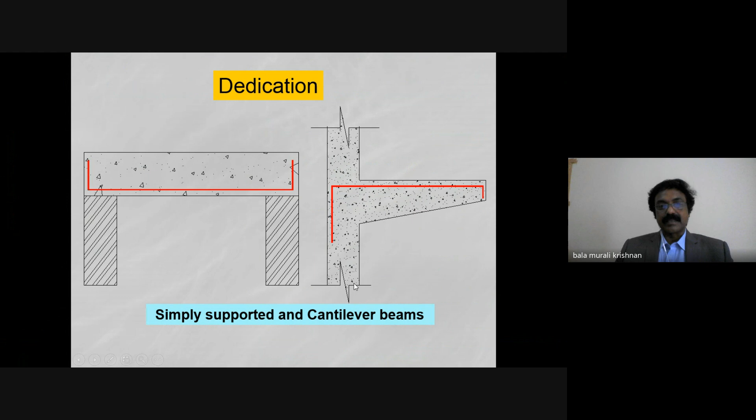Then who is an engineer? According to former USA President Herbert Hoover, who was an engineer before he became a politician: the great liability of the engineer compared to men of other professions is that his works are out in the open where all can see them. His acts, step by step, are in hard substances. He cannot bury his mistakes in the grave like the doctors. He cannot argue them into thin air or blame the judge like the lawyers.

He cannot, like the architect, cover his failures with the trees and vines. He cannot, like the politician, screen his shortcomings by blaming his opponents and hope the people will forget. The engineer simply cannot deny he did it. If his work does not work, he is damned. This is the major problem for civil engineers - we cannot hide anything, everything is open. Everybody can come and see his work, that is witnessing his work also.

So start from concrete. The base material for concrete is cement. Cement is a binding material. The age of cement is nearly 150 years. Earlier the grades were 33 grade cement, 43, 53. Now people are using PPC, meaning Portland Pozzolana Cement, which is fly ash based and silica fume based, in 43 grade.

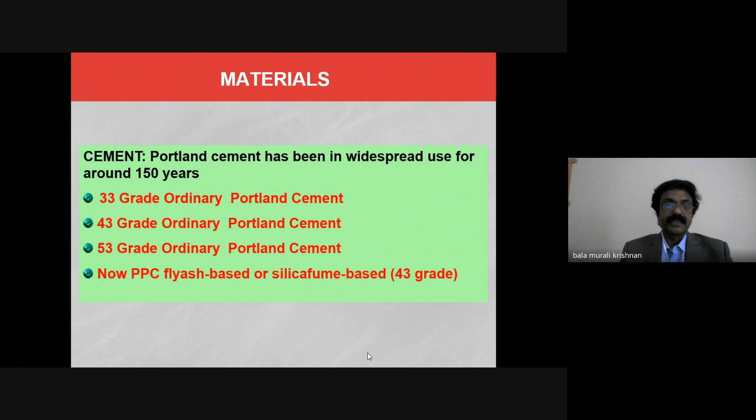M is a mix, 20 is the characteristic compressive strength of concrete after 28 days curing. So the minimum grade as per IS 456 for RCC is M20, for PCC is M15. For pre-stressed concrete, we have two types: pre-tension and post-tension. The minimum grade is M40 and M30.

Then come to rebar. What is the meaning of rebar? Rebar is nothing but a reinforcement bar, or we can say steel. The term reinforcement bar is worldwide accepted. If we come to Gulf countries or other countries, the people are calling it rebar only, not saying steel.

Okay, so earlier we were using mild steel. Do you know the meaning of mild steel? This is a plain bar without any ribs. The yield strength is not more than 250 Newton per millimeter square. That is the maximum range of mild steel.

Then they can go for Tor steel. Tor steel is normally drawn from mild steel, that word 'drawn' is very important. If you look at the stress strain curve for mild steel and Tor steel, mild steel has a definite yield point. Tor steel has no definite yield point, it's moving from beginning to end. Why is this happening? That's because Tor steel is drawn from mild steel, that's why there is no definite yield point for Tor steel.

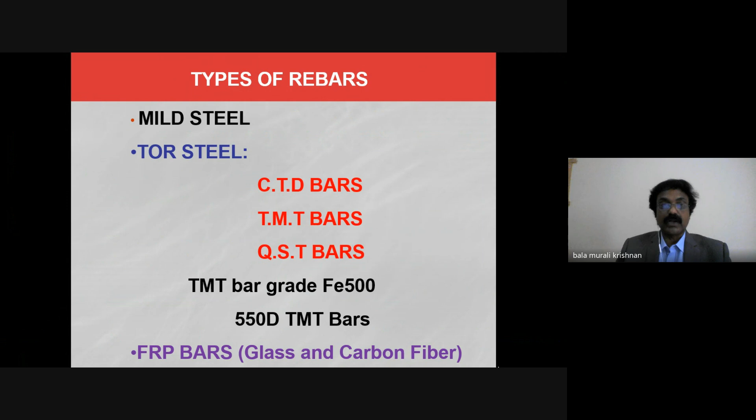The recent development is FRP bars, fiber reinforced polymer bar. If we talk about fiber reinforced polymer, we have two types there. Glass fiber is very famous, and carbon fiber, and one more fiber also is there, aramid fiber, that is very costly. That's why people are trying glass and carbon fiber.

And one more bar is there. If your construction is very close to the coastal area or an offshore structure, we go with coated bars. Coated bar means fusion bonded epoxy coated rebar, just like electroplating technique, where at a constant temperature the bar is moving into the paint booth.

The paint is already electrostatically charged paint. They stick onto the surface. It is a flexible epoxy system.

So we have enamel paint, polyester resin, then epoxy. Epoxy is the superior one. It's a two-component combination, base and hardener. If you mix them together, the polymerization process will take place, so epoxy is very rigid and flexible also.

If you apply it on the bar, what will happen? If you bend the bar, the paint also bends accordingly. This is the advantage of the paint. Otherwise, if you bend the coated bar, the paint will peel off. That's why they use the flexible epoxy system.

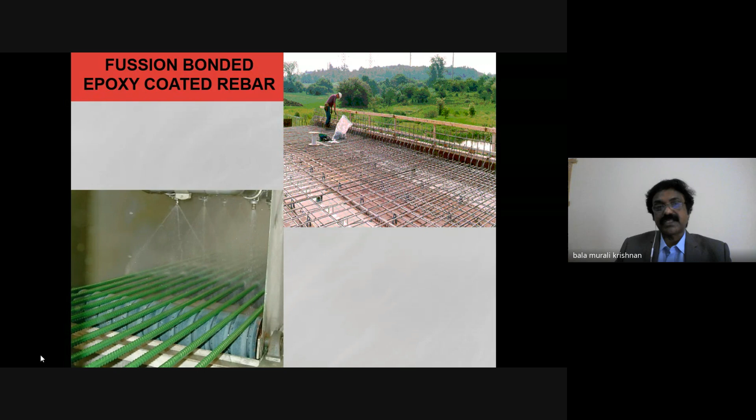If you bend the bar, the paint also bends accordingly. Normally the thickness is 250 to 500 microns. Do you know the meaning of microns? 1 divided by 1000 - that is a micron.

Next, FRP bar, which we discussed earlier. So this is for glass fiber. Now the recent development, we are using carbon fiber also. Then hybrid fiber also, mixing glass and carbon fiber together. Hybrid bars are available, FRP bars are available.

So the only problem is shear. The remaining thing works fantastically. We did a lot of experimental work in our college, in our university. The problem is shear, because of modulus of elasticity. Modulus of elasticity is very poor compared to steel. That's why shear is the major problem for FRP rebar. For bending it's okay, ductility is okay, everything is fine. Only for shear, you have to be doubly careful when using the FRP bar.

Once you use the FRP bar, there will be no corrosion. Corrosion is a major culprit for buildings. Corrosion is nothing but a cancer process in concrete - it's concrete cancer, similar to human cancer. Once the cancer starts, it will propagate everywhere. This is the major problem for concrete. If your rod is not corroded, you can ensure your building lasts 100 years or 80 years. Because of corrosion only, the building lifespan gets reduced.

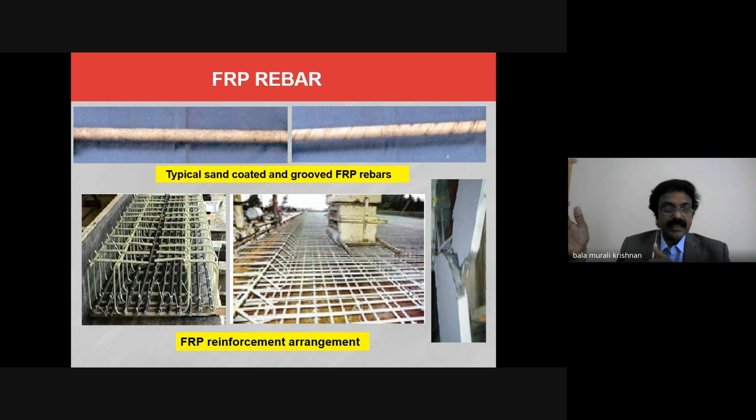Next we come to coefficient of thermal expansion. This word is very important for concrete. We are using it for RCC, which has two materials - concrete and steel. It is a composite material. As you know, the meaning of composite is two or more elements of different material acting together and carrying the load. In concrete, we have two materials, one is concrete, another is steel, acting together and carrying the load.

So normally we tell our students that concrete and steel are made for each other. Made for each other - how? Normally we say lovers or husband and wife are made for each other, but here concrete and steel are made for each other. The only reason we cannot replace steel right now - that is the major issue going on. We have been using concrete RCC for nearly 150 years, almost 150 years, and still we are not able to replace the steel.

Even rich or big persons cannot go for a golden rebar, copper rebar, chrome rebar, etc. What is the reason behind that? Only one thing - coefficient of thermal expansion. The coefficient of thermal expansion for steel and concrete is almost similar. That is the only reason concrete and steel act together monolithically. That's what we call a match - made for each other. At high temperature, like our Gulf countries, say Muscat, where temperature is more than 50, 55 plus, the hot temperature, steel and concrete still do not separate.

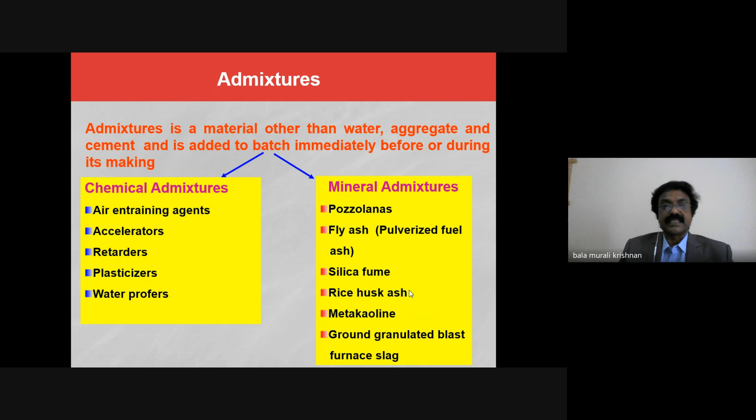Then plasticizers, as we just discussed - they're very interesting. The role of plasticizers is to reduce the water content. But reducing the water content means the workability will be lost. How do we balance the workability with the help of plasticizers? So the normal range is 5 to 10%, mid range is 6 to 15%, high range is up to 40%. We reduce the water content - the role is very important.

If you mix superplasticizer into the concrete, what will happen? This superplasticizer makes each and every molecule of the concrete separate - they form a small balloon around each particle. Because of this balloon, each particle departs from the others, making it friction free, so we can easily mix the concrete. During the hardening and setting time, each of these molecules or bulb molecules around the particle ruptures, and finally there is no superplasticizer left. This is the concept of superplasticizer mixing into concrete.

So many companies are producing superplasticizer. In India, Fosroc Chemical is there, Sika, Pidilite, LK, Hurricane - many companies are available nowadays producing superplasticizer. The range is very important.

But before adding superplasticizer into the concrete, you should know the quantity. Even the manufacturer doesn't tell the exact quantity, only a range - they give 50 to 250 ml for 100 kg of cement. If you look at any manufacturer brand like Fosroc Chemical Superplasticizer, they mention it like this. You have to narrow it down and go with a lot of trial mixes.

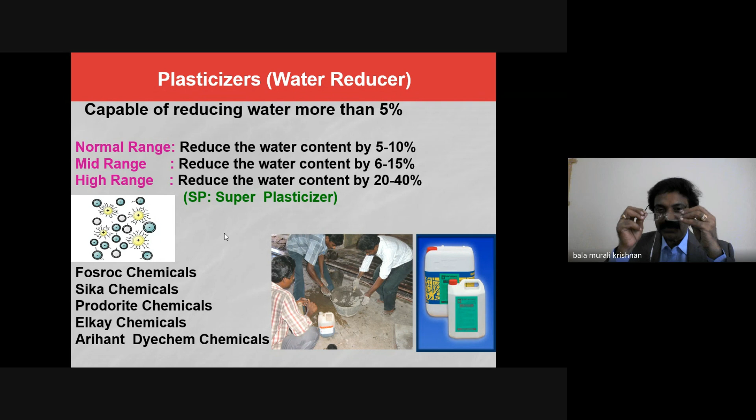So what happens? Delayed setting time. Delayed setting time is also a major drawback in the concrete. It loses strength. Suppose we are fixed for M20 grade concrete - due to delayed setting time, the concrete will not achieve 20 Newton per millimeter square at the end of 28 days curing.

So I didn't tell anything to that fellow, otherwise he may worry. I asked them to cover it with gunny bags, with a small wetting of the gunny bags. I told him it will set after 24 hours. But finally, how much did it take? Nearly 36 hours to set the concrete because of excess superplasticizer.

You should control the superplasticizer added into the concrete. That is very, very important. Don't simply purchase from the market and add it to your concrete without any idea or without any base study.

Then composites, polymer-based composites - nowadays a lot of required materials are available in the market, based on polymer modified concrete, polymer impregnated concrete. These things are available in the market. Latex modified concrete - latex is a rubberized material, an artificial rubber, not a natural rubber. Then FRP, we discussed it earlier.

GFRP, CFRP, aramid, and cement-based concrete - ferro cement, SIFCON, slurry infiltrated fibrous concrete, slurry infiltrated mat concrete. These are normally used, SIFCON types are used for bomb blast structures, because the tensile capacity is very high.

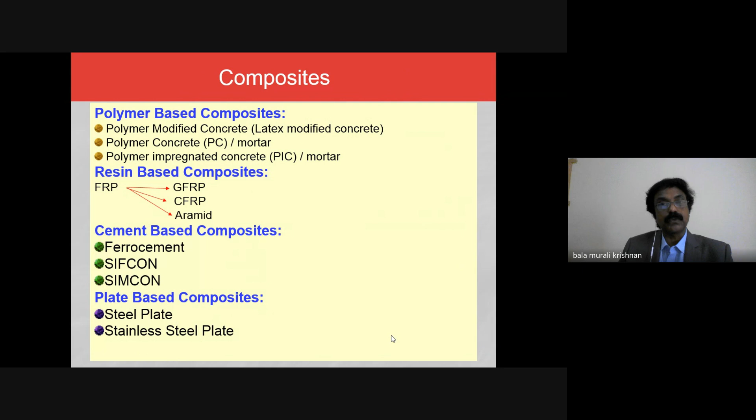I tried this in my beam retrofitting system also, I will tell you a little later. Then plate-based composites - steel plate, stainless steel plate, you bond these on the surface of the concrete, either beam, slab, or column also. This is for external reinforcement.

They are using this for CFRP - carbon fiber wrapping, steel plate. This is for retrofitting or enhancement. Retrofitting is nothing but enhancement. Rehabilitation means to retain the original load carrying capacity of the structure.

To retain means to go back. Retrofitting means enhancement - suppose you want to increase the capacity of the column or beam, whatever it be, so you can go with this kind of retrofitting using steel, GFRP, CFRP, etc.

So this is glass fiber mat wrapping, bonded into the bottom surface of the beam, that means the tension face of the beam. For the column, it's wrapped around all four sides. This normally increases the load carrying capacity by 30 to 40%.

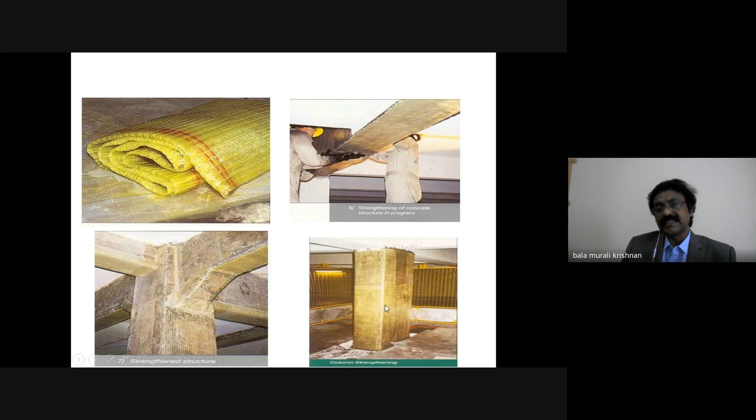We are using this kind of retrofitting system, normally increasing the capacity by 30 to 40%. This is carbon fiber wrapping, also retrofitting. See, the beam and column are in perfect condition without any distress in the concrete.

Why do they go for these things? They want to apply the retrofitting technology - retrofitting means enhancement, further improvement. See, this is carbon fiber wrapping in the column. This is a beam-column joint, four beams meeting at the column, using carbon fiber wrapping.

Normally for seismic design, the beam-column joint is very important - mainly the joint fails during an earthquake or heavy wind blowing. Compression and tension continuously act there, and finally it gets detached. So this is a vulnerable zone.

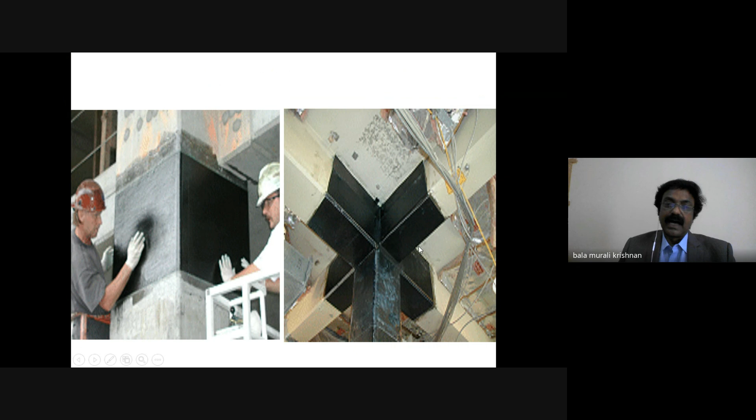For seismic-prone areas, this is ferro cement. Ferro cement is very famous - not just now, but for more than 50 to 70 years, ferro cement has been very famous.

Installation is very easy without much difficulty. As you might have seen in the drops of the portico, everything uses ferro cement, chicken mesh or weld mesh with high performance mortar. The mortar ratio is 1:2 or 1:3, just mortar, and it will penetrate into the gaps of the mesh. So finally, it becomes a reinforced mortar.

In high temperature regions like Gulf countries, people use mesh at the outer surface before plastering, which increases the tensile property of the mortar. So finally, to avoid micro cracks and macro cracks on the surface of the wall, ferro cement is the easiest and cheapest method of repair.

It acts as a repair material, and also as drops, panels, and precast panels. For small water tanks, we can go with ferro cement water tanks. Even small boats are available in India made with the help of ferro cement.

Normally we use skin reinforcement to maintain the shape. This is the skin reinforcement, normally smaller diameter, 8 mm or something. Over that, you put chicken mesh or weld mesh, single layer or two layers, it depends. Ferro cement is a very cheap material, easily available in the market. Chicken mesh is available in rolls.

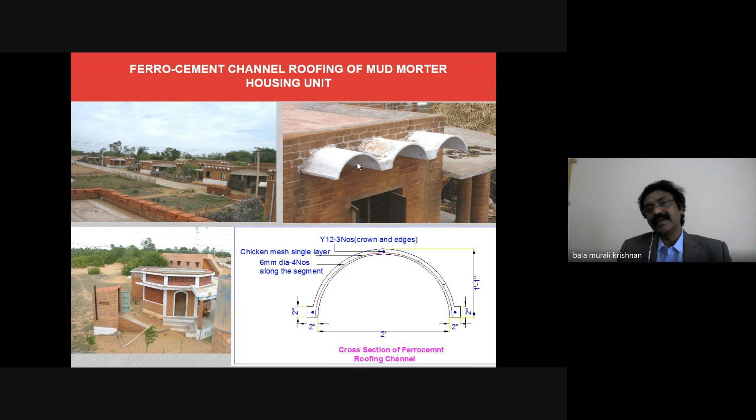So this is a lightweight partition. If you go to high-rise buildings, the major problem is dead weight. How to reduce the dead weight of the building? The only thing we cannot reduce is the column and beam size, that is as per the design. The only thing you can reduce is the filler material, meaning partition, outside wall, inside wall, whatever it be, we can reduce.

So normally, using lightweight material, we get lightweight partitions. Lightweight material means pumice, sintered fly ash, many things available in the market. The density is around 450, and one more option is ALC panels, autoclaved lightweight concrete, with density around 650 kg per meter cube.

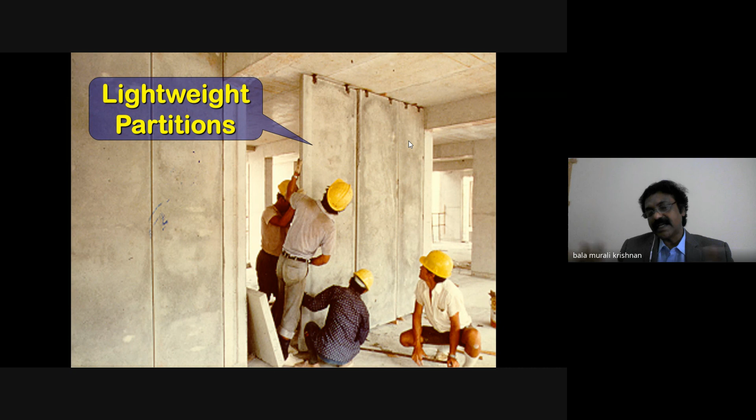Our concrete is nearly 2400 to 2500 kg per meter cube. Within 300 or 400 kg per meter cube, we can go with lightweight partitions. So finally, the dead weight will be reduced. For high-rise buildings, dead weight is a major concern. Your foundation also gets reduced, so finally you are achieving economical construction.

So high performance fiber reinforced cementitious composites, this material I tried for beam retrofitting. First I cast the laminate. Then this is the beam, a rectangular beam. For my convenience, I inverted the beam. This is the tension face of the beam.

Just I go with sandblasting, which means making the surface rough. After that I use epoxy resin. This is the mixing of epoxy resin. Epoxy resin normally has two materials, base and hardener. Some filler is also required, fine sand or fine particles we can mix together as the filler. All three materials, base, hardener, and filler, are mixed together.

They go to bonding on the surface of the tension face. This is the final product. It will increase the flexural capacity of the beam nearly 1.8 times. So this is also possible.

Inverted or normal? No, the testing, this is the testing methodology. So this is the support condition. We apply the 2-point loading here, then we reach up to the ultimate stage, ultimate load.

But how will the bonding be there with it? So that is a major issue, sir. If your bonding is good, there will be no issue with it, it acts as a composite material. I told earlier, two or more elements of different material act together and carry the load. Here the two materials are the beam and the laminate. The two are bonded with epoxy resin.

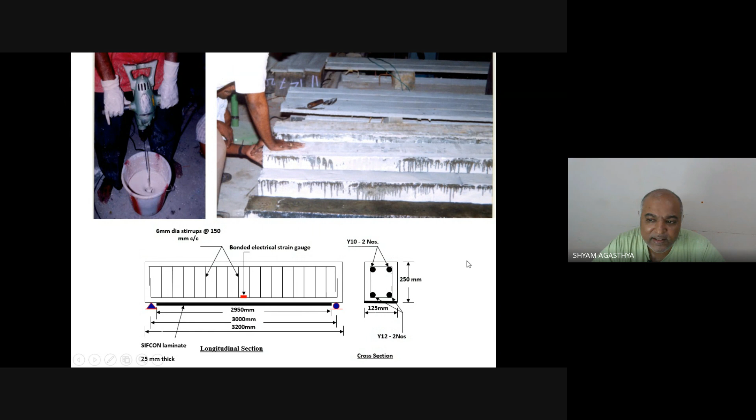Instead of tensile reinforcement, can the laminate be put inside and then tested? This is for repair work, sir—retrofitting, or we can say rehabilitation. For distressed conditions, we can do like this.

But can it be done for a normal beam as well? Can we replace the reinforcement? For a normal beam, we can do anything, sir—that's not an issue. We can increase the reinforcement or put it at the bottom, anything we can do. Only for an existing structure, how to do retrofitting and rehabilitation—that is the main thing.

During construction, anything is possible—inside also possible, during construction is fine. We are focusing on existing structures.

Okay sir, thank you. See, another important thing: composite deck slab. Now construction uses steel columns with composite deck slabs. If you go to any building, they provide a main beam and a secondary beam. The main beam is support to support, column to column. The secondary beam is beam to beam.

So over that you place the deck profile sheet, and we connect the shear connectors—I will show the next diagram. Shear connectors, then you place the concrete. The reinforcement is almost negligible, only a nominal reinforcement is provided. Over that, we place the concrete.

See, one construction in Trichy, Tamil Nadu, is by my friend. Actually this is normal practice, but he is doing it his own way. During construction, what will happen? The sheet will sag, so he stopped the construction activities.

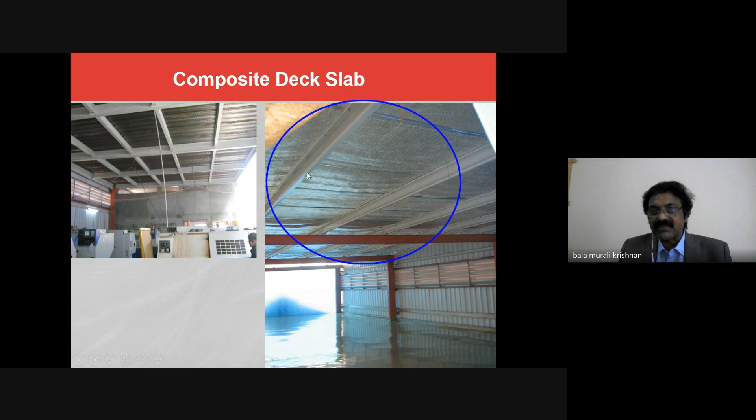He called me immediately. Normally, when you provide the sheet, there are two types of construction: one is propped construction, another is unpropped construction. Propped construction means the regular conventional method—we give props during concreting and after hardening we remove the props. The unpropped method requires no support at all—no props, no jacks, nothing required. So in this particular case, you might have seen the sagging condition of the profile sheet. Then they called me and we gave the solution.

This is a composite deck slab, top view. This is the main beam, and secondary beam is also there—I am showing the main beam. Over the main beam, we place the deck profile sheet. This sheet is called cold form sheet. You know what hot rolling process and cold rolling process are? Based on the cold rolling process, we achieve this sheet with corrugation.

Then you provide the shear connectors. Shear connectors are drilled into the main beam—this portion is projected after drilling. It is called shear connector, or we can say shear stud. Why do they provide shear connectors? Because this is a sheet, and concreting happens over it. So the sheet and concrete achieve compositeness with the help of shear connectors.

Look at this sheet, it's a corrugated sheet. Then you place the reinforcement and pour the concrete. So the shear connectors achieve the compositeness between sheet and concrete—this is called shear stud or shear connector. Nowadays all construction is going toward steel columns with composite deck slabs.

Composite deck slab—so what is the advantage of deck slab? Very fast, no centering required, nothing required. No need to wait for anything—immediately you can raise the column and go to the next floor.

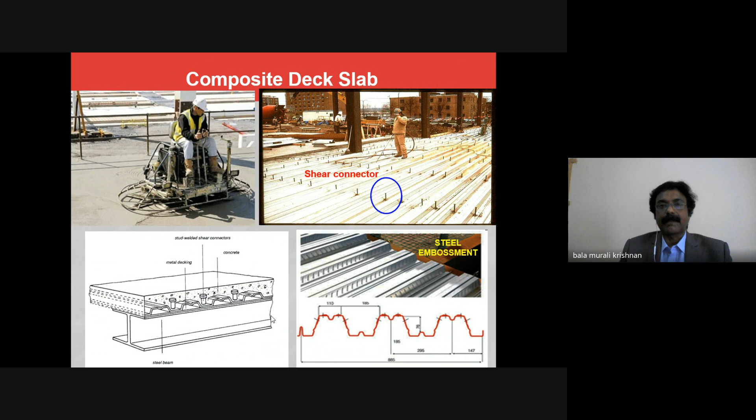Right, now we come to RCC design and detailing. Sir, if anything is boring, you tell me. No, can I continue? Yes.

There is no projection of flange on both sides. The flange is nothing but your slab. There is no separate flange for any beam; the slab itself acts as the flange.

Normally, the width of the beam is, for example, 300 or 230 mm. The number of reinforcement bars is, say, 5 numbers of 20 mm diameter. How should we place the reinforcement?

Placing 5 bars in a single row is not possible because sufficient gap is required; otherwise the concrete is not able to penetrate into the rebar. The minimum gap between rebar is 25 mm, or the diameter of the largest rebar used, whichever is more. Suppose the rebar is 30 mm diameter, then the gap should be 30 mm.

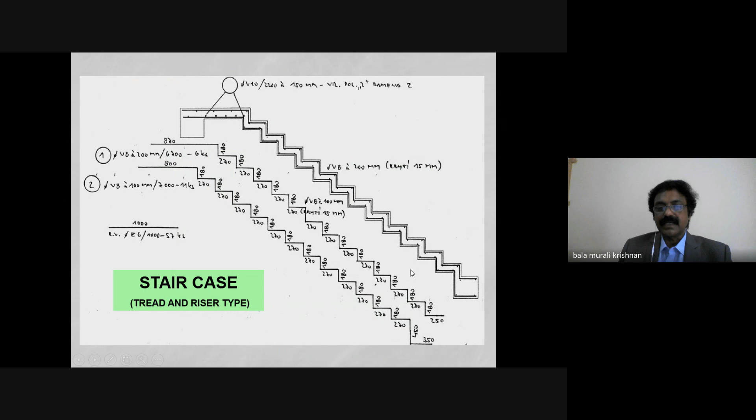So they placed the concrete, and after 28 days they removed the shuttering. What happened? It collapsed. Once they removed the shuttering, there was a sudden collapse without any delay, after 28 days of hardening. What is the reason behind that?

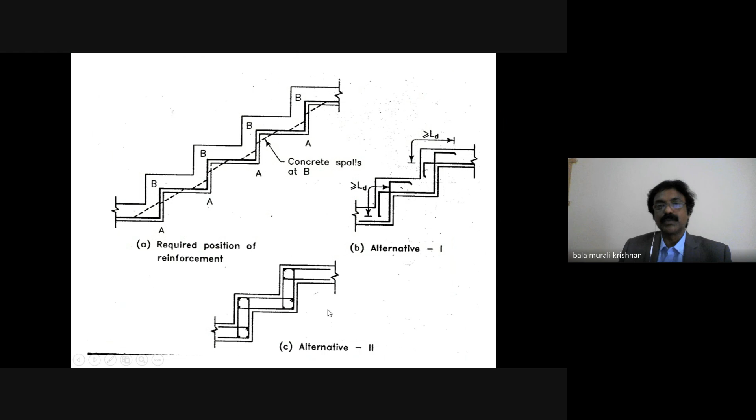There was no interaction between the compression reinforcement and the tension reinforcement. We should make them interact; otherwise such cracks or even collapses occur, not just cracks. So the compression reinforcement and tension reinforcement should interact - that is very important. The top reinforcement and bottom reinforcement should interact.

It is provided in the form of rings. This is the main reinforcement, and this is also in the form of a ring. This is the way we practice it in the field.

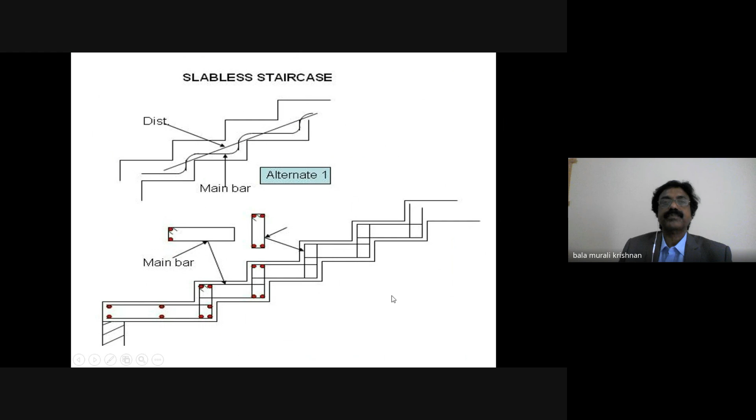This is a straight staircase, normally adopted in house construction - a single flight with a landing, like that. At every junction, stress concentration is higher. If you provide the same tension reinforcement straight through to the end, it will fail. At the junction, the tension reinforcement becomes compression reinforcement, and the top compression reinforcement becomes tension reinforcement. It should interact at the junction.

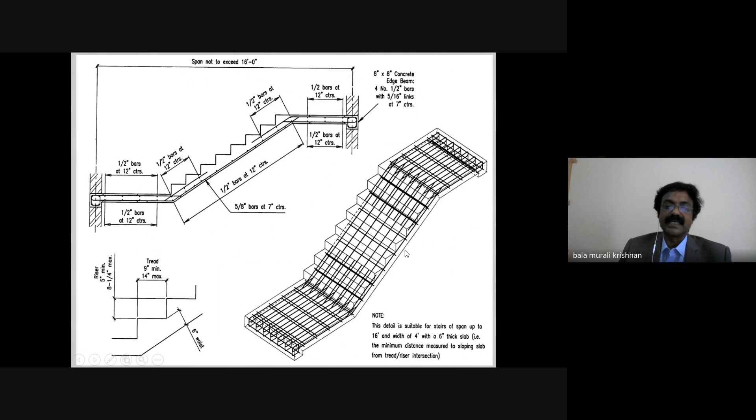Normally people call this scissor reinforcement. Look at this diagram, you can understand it clearly. Mainly for staircases, at the junction, it should be scissor reinforcement - tension should become compression, compression should become tension. They should interact with each other. This interaction is very important.

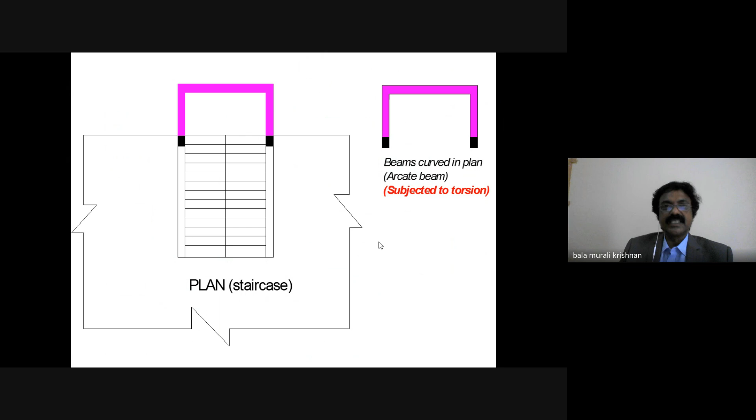There's some flat construction where the beams are like that, so the beam is subjected to torsion. Normally in any construction or beam, we generally have two stress resultants: bending moment and shear force. In some cases we have three stress resultants: bending moment, shear force, and twisting moment. So this beam design involves twisting moment - torsion is developed, and accordingly you have to design the beam.

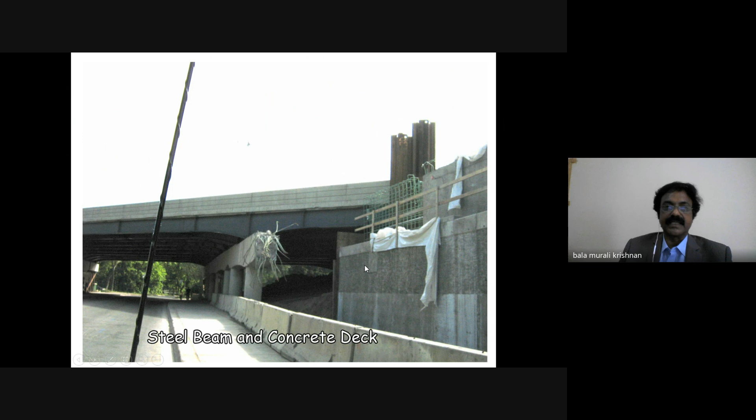The reinforcement position is very important. I will show the diagram so you can understand it easily.

Any column or beam reinforcement should have a minimum diameter of 12 mm - if you're using any reinforcement in a column or beam, it should not be less than 12 mm diameter. That is very important, and stirrups are also very important.

Normally we call them stirrups or ties when the column is subjected to shear. Shear means seismic force or wind force - that is, horizontal or lateral force. The column is subjected to lateral force, so the column is subjected to shear. In the normal case, with only vertical load, dead load and live load, there will be no shear, and in that case it is called ties.

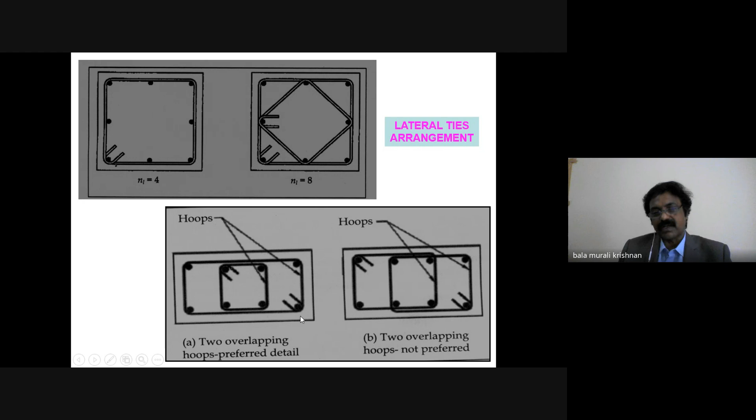Ties normally provide two-legged or four-legged ties. This one is for two-legged, all numbers. As per Indian code and British code, one tie should connect all the reinforcement, and in the same cross section we provide another tie. Same cross section, that is more important. So 2 plus 2 makes four-legged ties or four-legged stirrups. This is more important, I will show some diagrams so you can understand clearly.

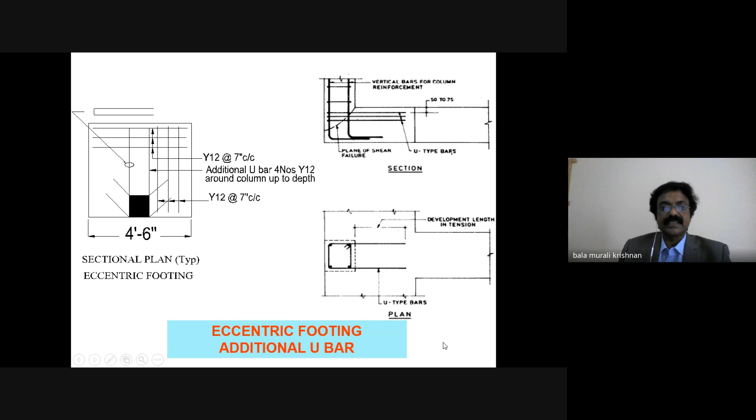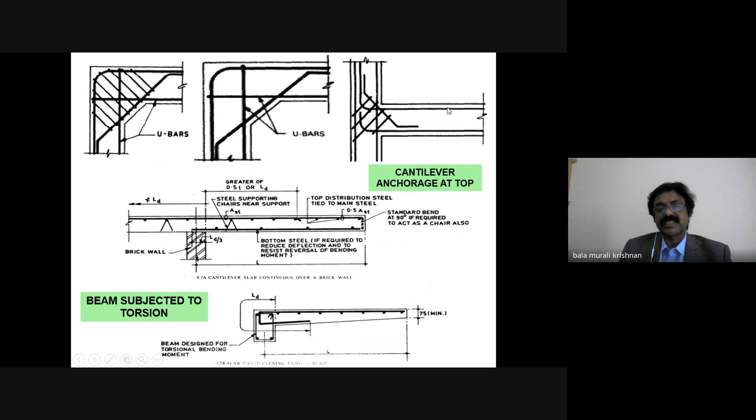This is for overlapping, lap length. This is the formula for lap length: LD equals phi into sigma s by 4 into tau bd. Normally in general construction we take 50 diameter. In tension there is some variation, in compression there is variation too. If it is welded, the lap length will be less. In general, it should be 50 diameter.

One more thing about beams: a beam subjected to torsion requires side face reinforcement. For beams subjected to torsion, this applies when depth is 450 and above. For normal beams, 750 and above. So for torsion beams, depth of 450 and above requires side face reinforcement - this is 0.1% of web area, provided on both sides. When the beam is not subjected to torsion, in a normal beam, if depth is more than 750, you provide side face reinforcement.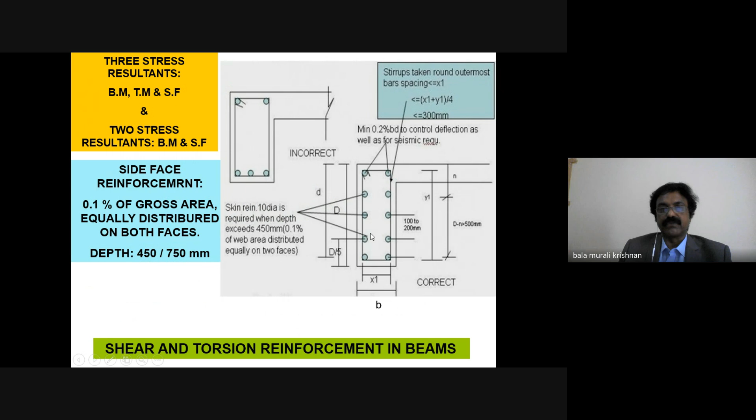This is a very interesting thing - a cantilever beam with a prop. After construction, after laying concrete and 28 days curing, you can remove the prop, either from right to left or left to right. This normally confuses people at the site - right to left or left to right. And after removing, some people, as you might have seen at the site, give one prop at the free end. What will happen then? We'll discuss these things with this photo.

Understand, this is a cantilever beam, this is a column. Tension reinforcement is at the top, there is no compression reinforcement - compression is zero, no need for any since it's cantilever. We only design for tension, tension at top. Everything is perfect. We place the concrete and wait for curing. After 28 days we remove the props.

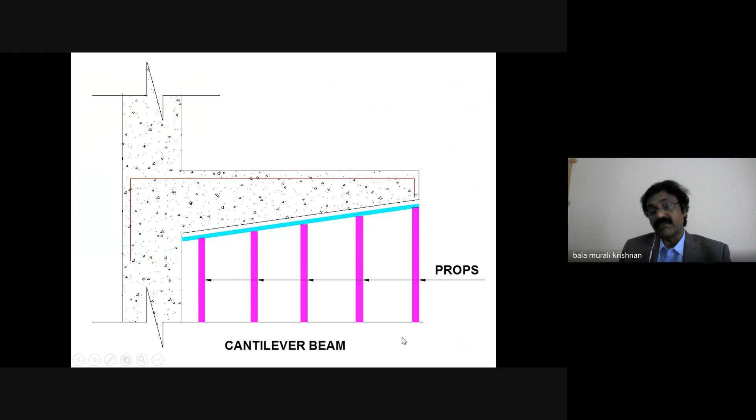Remove the props either this side or that side. Normally we remove the prop from free end to supported end. Moreover, you should not give any prop support at the free end after construction, after the concrete hardens. This is a wrong practice. What will happen? This beam acts as a proper cantilever. If you look at the bending moment diagram you can understand clearly - this is a cantilever, maximum bending moment and shear force at support only, at the free end only for deflection, maximum deflection at free end. This is the maximum bending moment, so at the support only, at the free end it's zero - fine.

Now, if you provide one support like this, suppose you leave one support at the free end after removing the formwork, what will happen? This beam now acts as a propped cantilever.

Up to some distance, it is sagging, then hogging. Sagging is positive and hogging is negative. In our case, there is no reinforcement at the bottom. Am I correct? There is no reinforcement at the bottom. So if sagging means we need reinforcement at the bottom, what will happen? So you understand the consequence.

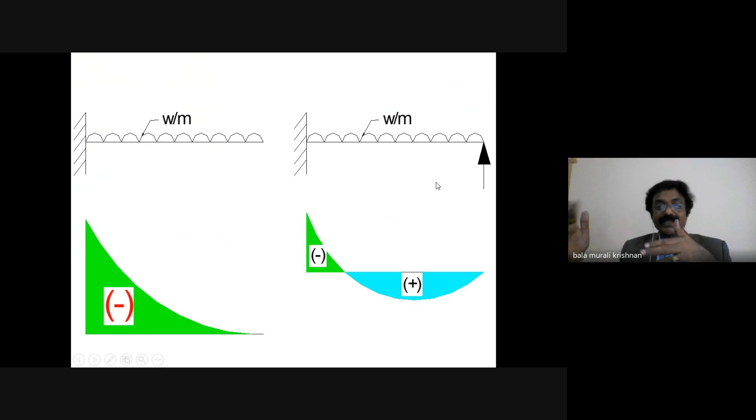So don't convert a cantilever into a propped cantilever if it's meant to stay a cantilever. Some people treat the portico as a cantilever, then later convert it, raising a room at the first floor and giving support at the free end. What happens? The beam acts as a propped cantilever, and a lot of cracks appear in the wall. I've attended many such cases in my area.

This means engineers in charge at site should be technically sound, fundamentally strong, to understand how different structures behave, so that they can inform the laborers. This is a big challenge for engineers, who interact with laborers who don't know all these things. You have to be technically and fundamentally strong to tell them what happens when they do such nonsense things. Normally, when any problem comes, only then do house owners approach the engineer.

Most of them construct one building and think they've become like an engineer. They act as an engineer. They construct 2 or 3 buildings, and their whole behavior becomes like an engineer, the chief engineer. So they simply dictate to the laborers and finish the work. Then later, within 3 months, sir, this happened in my place, even in my hometown.

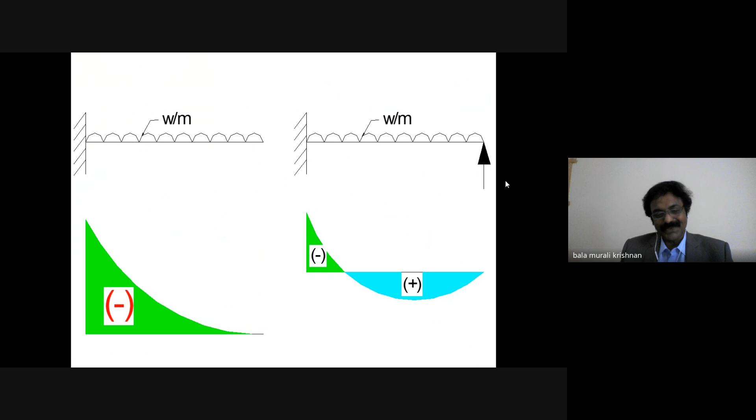Within 3 months so many issues came up. The entire outside wall is fully cracked. Unbelievable, you can see the crack even from outside, that wide. So these things are happening quite commonly in our area, and not only in India.

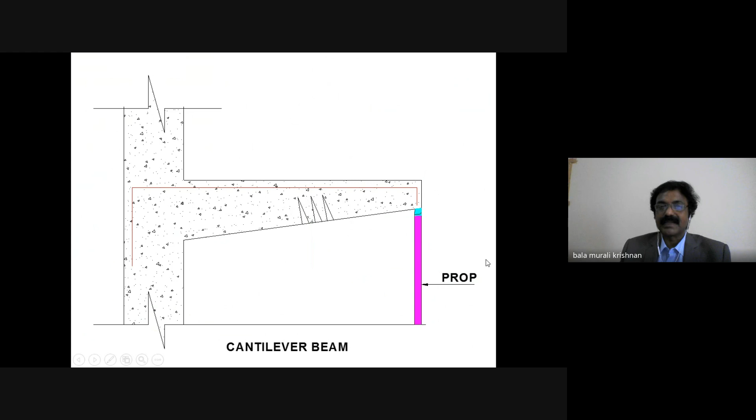See, with a propped cantilever, this is how cracking happens. The lateral crack reaches up to the wall, over the beam. Another thing, this is one floor, this is the portico, and this is the inside of the building.

Now this is the formwork, I hope you understand. I managed it somewhat with an AutoCAD drawing. Assume these are all the formwork, this is the sheeting, these are the jacks. Just assume the same is there too.

After hardening, after 28 days of curing, we want to remove the formwork. Which side first, inside or outside? Some people, by normal tendency, remove this side also, the portico side too. What will happen? The load hasn't yet transferred from the jacks to the beam and wall; you're still only centering and shuttering. So what happens? There's a chance the portico may overturn without any counterweight.

First you have to remove the inside support. Then automatically all the load transfers to the beam, so it becomes fully restrained without any movement, and then you can go to the front portico. That way there will be no overturning or other issues. Otherwise, you will definitely see major consequences.

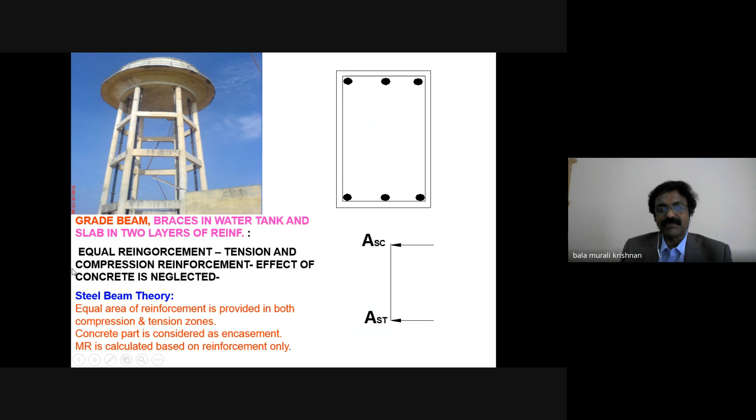This is normally used for a grade beam, for top and bottom reinforcement in clay soil, and this one is a little deeper. I'll just skip this, there are two types of theories here, one is concrete theory, one is steel beam theory. I won't go into that in depth, it's a bit complicated.

Now we come to arches. Arches are our traditional style, all heritage buildings, old buildings, palaces, everything is made up of arches, mainly at openings, for doors. Even our old construction, buildings 100 or 150 years old, are made up of arches. Why did people use arches in old construction? Because there was no RCC in those days.

Only stone construction or brick construction was used, either stone structures or brick structures, with small bricks joined with lime mortar. So they used the arch concept. What is the concept of an arch? People understood this concept of arches a thousand, five hundred years ago. In an arch, the bending moment at every cross section is equal to zero.

This is an interesting thing, each and every cross section has bending moment equal to zero. What is the tendency of an arch? It only tries to flatten. If you apply a load over the arch, it tries to flatten.

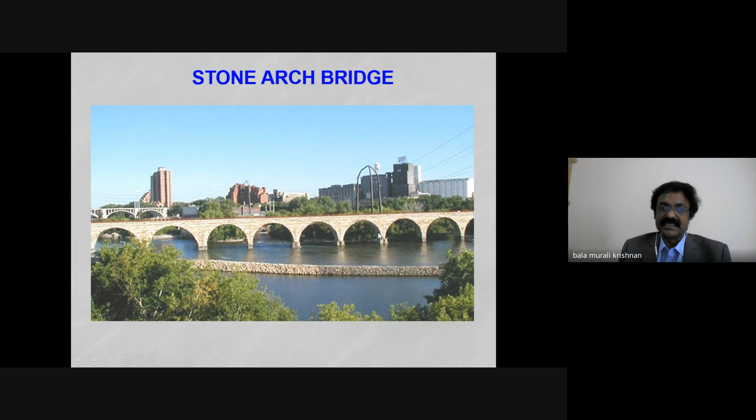Only thing, if the two edges are fully restrained, there will be no problem. This is the idea of the arch. So in the kingdom period, or in all the old heritage structures, even some old bridges, are made up of arches. This is the concept. In an arch, each and every cross section, the bending moment equals zero. That's why still people are believing in arches.

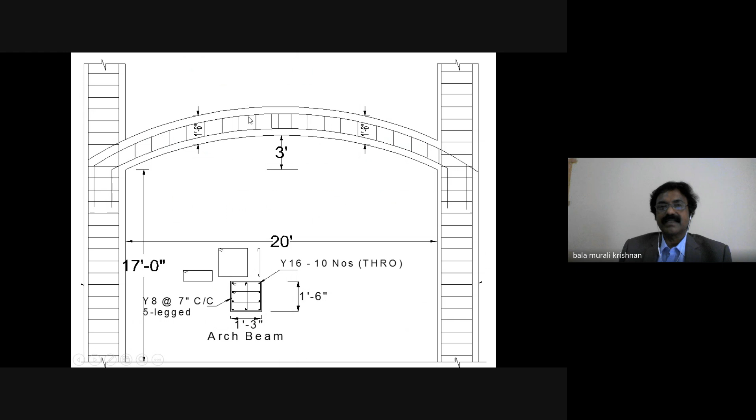So the reinforcement is very interesting. All four sides we provide the reinforcement. That's all, the reinforcement must be on all four sides. This is an arch, all four sides. It should be properly anchored into the column. Otherwise, the tendency of the arch is to try to flatten. To avoid the flattening of the arch, the edges should be fully restrained, so there will be no flattening. The reinforcement is always on four sides. Always four sides.

Okay, this is another interesting story. Actually, based on our failures only, we formulated these things. It is not available in any textbook. This is a compound wall construction. You try to understand, this is a compound wall, and this is a pile, normally 8 to 9 feet. You put the pile, not too much depth, around 7 or 8 feet.

What will happen in all the outskirts of the city? Normally the soil is almost clay soil, and clay soil has a bulging nature. What will happen if you construct the compound wall with a straight grade beam, or conventional grade beam? Due to it being a freestanding structure, there is no load on top. It's freestanding. In big constructions we are trying to achieve 100% crack-free structure.

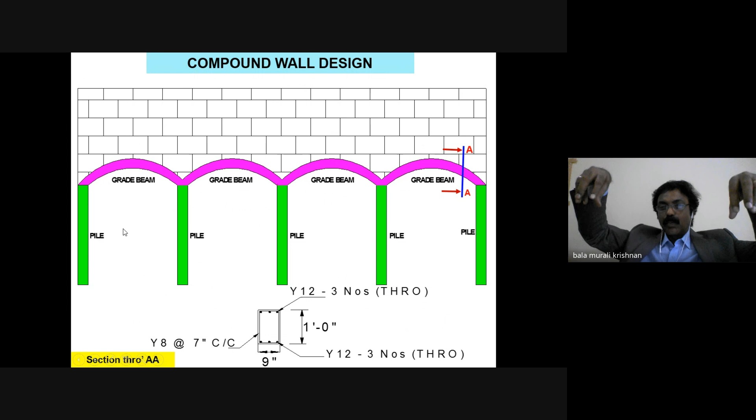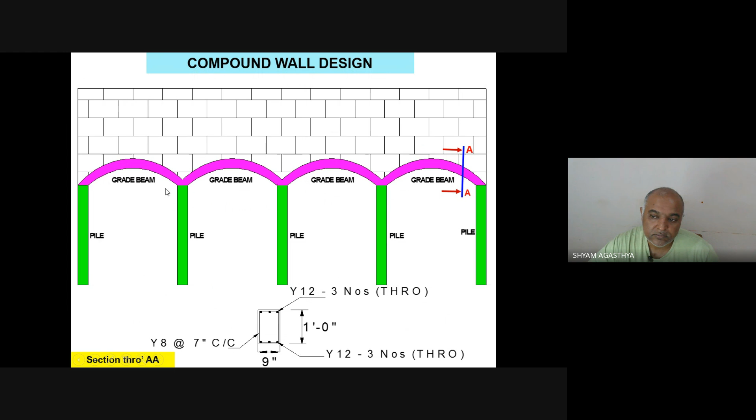We did many precaution measures, but we were not able to achieve any without crack. Many compound walls are cracked. So finally, why is it cracked? Based on our experience, we came to understand the clay soil is bulging in the rainy season due to the weight of the compound wall. It is bulging. If bulging means the two piles are moving downward, and in between, the soil is moving, the bulging soil moves upward, it will overturn your beam in the outward direction because of bulging of clay soil.

If it is a horizontal beam, what will happen? It pushes the beam towards the top. So over the beam, your wall is there, and the wall will be cracked, more wide at top, less wide at bottom, because of bulging. So finally we decided to make this beam as a small curved beam. What will happen? There will be no crack at all. This is based on experience only, you come to understand, mainly for freestanding structures, especially for compound walls.

So this grade beam, you know the meaning of grade beam? It rests over your existing soil. So you make it slightly curved, not this much, for understanding only I am showing like this. It's a slight curve, say about 3 inch or 2 inch, we go with curving the beam. So finally we completely eliminate the cracks. Mainly for clay soil, if the soil condition is good, like sandy soil, sandy bed, it is not required. It's only for clay soil.

Mainly for most construction in the outskirts, they are using cultivated land only. They convert it to construction purpose. They are all cultivated land. They make a market plan and sell it to the people.

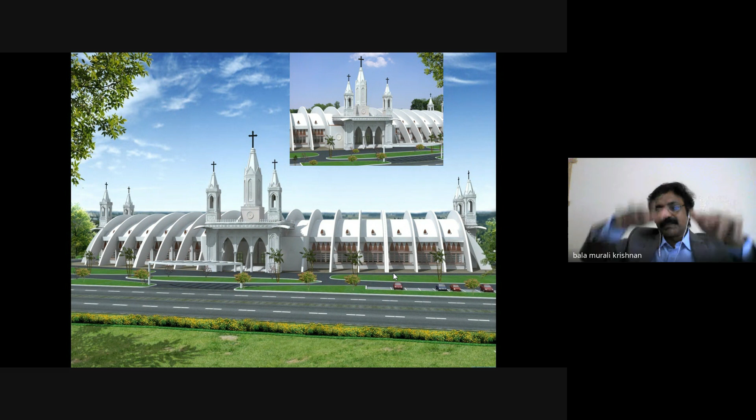This is an arch type construction. We discussed the arch, each and every cross section bending moment is zero. Finally, what happened in the arch? What is the tendency of the arch? It tries to flatten because of the roof load and other things. So the end should be restrained, the end of the arch.

So normally, how to restrain it? With the help of the beam below the ground level. I think you might understand fairly. The arch tries to flatten, so how to arrest the movement of the arch? There is a slight movement because of the load, because of the flattening. So what happens? The beam is subjected to tension.

The beam is subjected to tension. Initially we tried for an RCC beam. The designer, before construction, analyzed everything. So what happens? The beam is pulling. In the RCC beam, this is not possible.

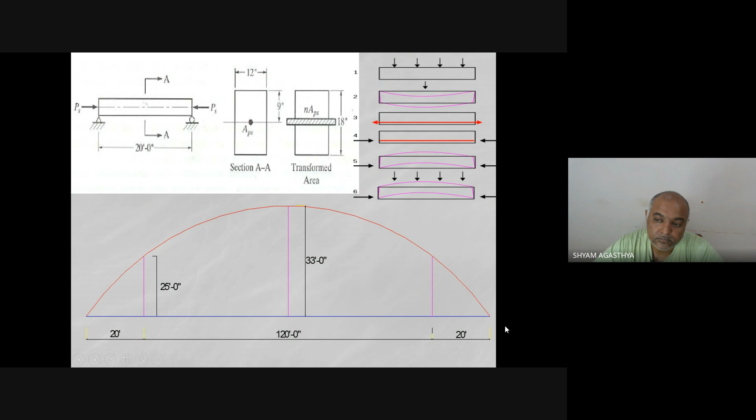Then you go with the post-tension beam. The post-tension beam is stressed and anchored. This pulling and that anchoring, both will be compensated or nullified. The pulling force and compression force, both will be nullified. This is for PT beams, post-tension beams.

Then PT slab is common everywhere. PT slab means post-tension slab, normally a flat slab. When you go to any building, any apartment building, huge buildings, office complexes, IT corridors, everywhere in Bangalore, Tamil Nadu, wherever you go, the construction is flat slab. What is the meaning of flat slab? Flat slab is nothing but a beamless slab.

For the beamless slab, we can go for RCC slab, but RCC slab has a restriction - we can go up to 6 or 7 meters only. But people want column-free structures, wide areas, 10 meters without any column. So this is the only option.

PT with the post tension. This is for the post-tension PT duct, and this is for conventional reinforcement - nominal reinforcement along with the PT. This is the end arrangement, this is the anchorage zone.

This is called strands, small wires twisted together. It is factory made. This is the anchorage unit. This is a locking arrangement, male and female cone. After stressing, they lock it.

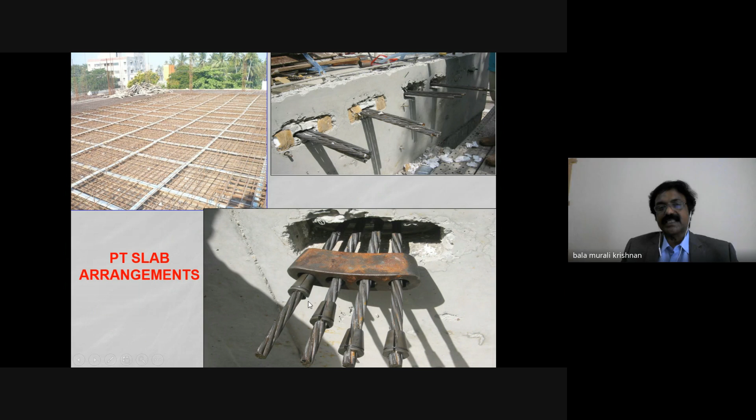We're not going further into this in this lecture. If required, we will cover pre-stressed concrete separately.

Now another important thing. This is the main beam, and another beam crossing it is called the secondary beam - main beam and secondary beam. Additional reinforcements are required here because the impact of the secondary beam will be more.

You give two numbers of 12mm diameter bars, put them in this shape, and place the secondary beam over that before concreting. This impact will be reduced and the load will be distributed to the beam because of this shape. This is called additional reinforcement - there is no design calculation for it at all.

Even mainly for floating column - you know floating column? Floating column means the column starts from the beam, not at the ground, not at the earth. There is no foundation at all for it. That is called a floating column. The floating column also rests over the beam directly, so we provide this kind of reinforcement.

For a floating column, what should be the minimum depth of the beam? That is very important, sir.

Actually, any floating column we can consider as a point load over the beam, and accordingly you can design it. So normally the point load action is more - like the floating column, the entire load comes to the beam only as a point load. So accordingly, based on the point load action, minimum 2 feet depth is required. You want to consider the point load action, and based on that only you can design the beam perfectly, otherwise the beam will fail.

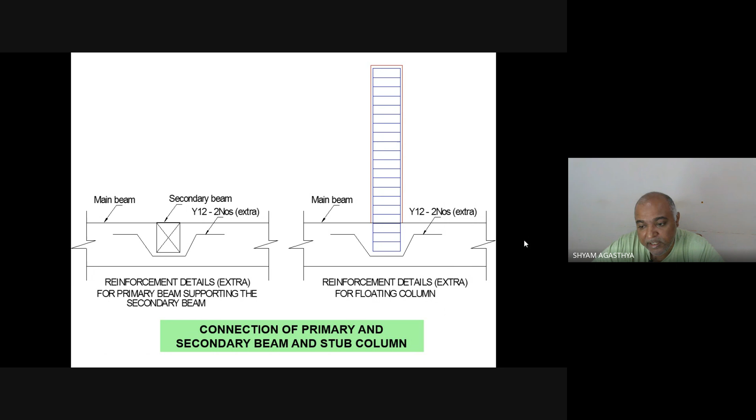Very critical. Normally we ask what is the difference between a shallow beam and a deep beam. Shallow beam has only one neutral axis, deep beam has more than one neutral axis.

Next I'll discuss ring beams - any water tank ring beam. The ring beam breadth will be more compared to depth of the beam. That is a major concept, mainly for ring beams, B equal to D. If B is less, D is more, lateral thrust will be more. That's why all ring beam designers use B equal to D, D equal to B.

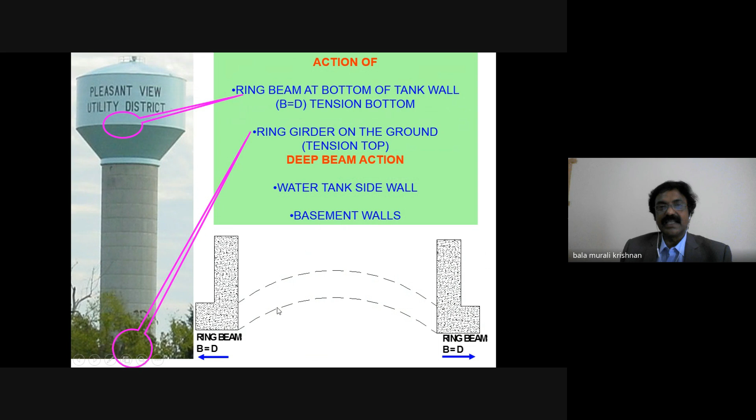So this wall is designed as a deep beam. Wall is designed as a deep beam - mainly for side wall of water tank, basement wall can be treated as a deep beam.

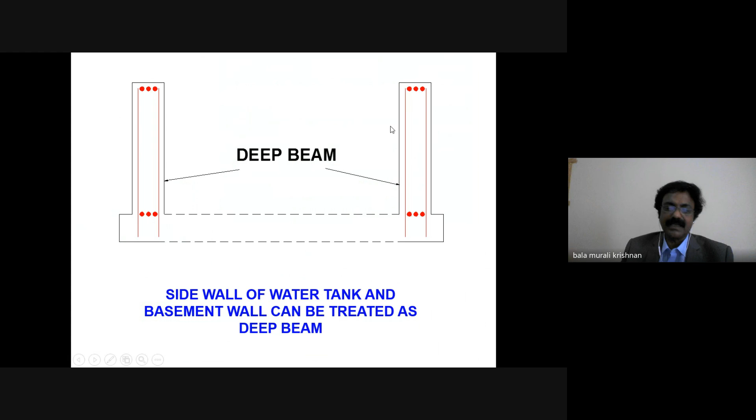People are asking what is the deep beam concept - more than one neutral axis, so the analysis is a little bit complicated. Even one neutral axis - above is compression zone, below is tension zone - that's one neutral axis for shallow beam. Here, more than one neutral axis, maybe two neutral axes coming for a deep beam. Based on that, you can analyze the beam followed by design. This is the deep beam concept.

I told you in the previous slide about confinement of column. If you provide two-legged stirrups, the voids will be more. Four-legged stirrups, the voids will be less, so the column is more confined. It depends on your stirrups.

The role of stirrups - it has a 135-degree bend, the projection is around 10 diameters into the inner core of the concrete. Any lateral force acting on the column, there will be opening of stirrups. It is well intact, but mainly for columns in earthquake prone areas, in these cases you take double care.

Normally, when lateral load is acting on the column, the first point of load transfer is the stirrups. Once the stirrup legs open, the vertical bars start bulging. To avoid the bulging of bars, you have to provide proper stirrups with proper legs - 135 degrees with respect to horizontal, and the projection of the leg, like a scorpion's leg, should be 10 times the diameter. It is properly merged into the inner core of the concrete so you can easily understand the confinement effect.

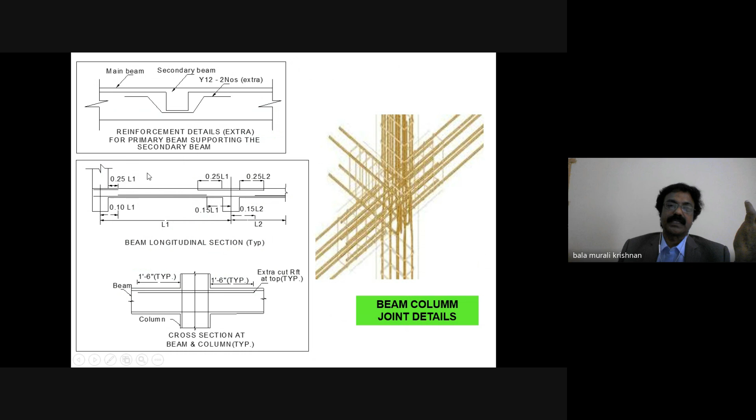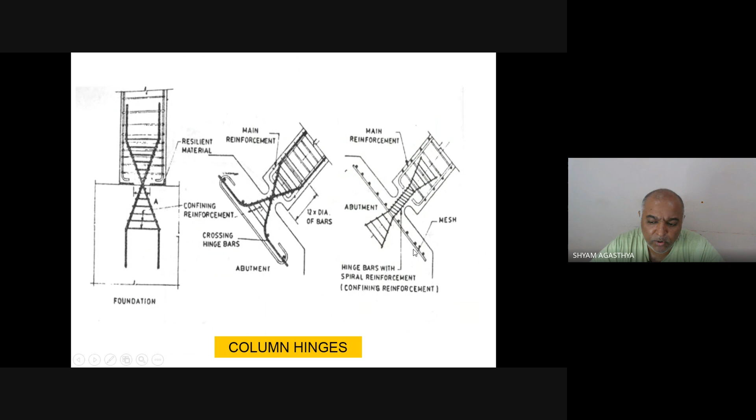In architectural drawing, you might have seen one wooden column with a small thing - that is a hinged location. Knowingly or unknowingly, people were doing this long back, 1,000 years back, 500 years back. Especially if you go to big temples, you will see the doors on the hinge. The wood mainly for the Keralite temple - just a curve is there, a small portion is there, and after that it's resting over the stone bed.

Next, we come to retaining wall. In any retaining wall construction, you give weep holes - weep holes meaning on the other side there is earth fill. During the heavy rainy season, you can let out the water from the hole. Otherwise, what will happen? The weep hole is weeping - you don't understand the meaning of weeping.

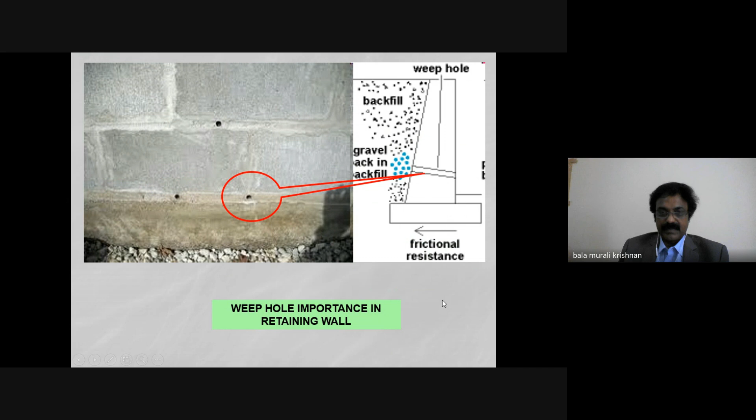Crying - exactly, it is crying. This is weeping. So if it's not weeping, what will happen? Hydrostatic earth pressure will be more because water is there during the heavy rainy season, and the wall may overturn. So the weep hole is very important for retaining wall construction. This is one retaining wall design along that - we provide the weep hole. The weep hole sometimes gets clogged, that's why you provide brick bats and other things. We can provide on this side nearly 2 feet, after that filling the soil to avoid clogging of the weep hole.

Then rebar grouting - this is for cathodic protection, very important for corrosion. Cathodic protection: our Burj Khalifa building also uses normal reinforcement only, there is no special reinforcement, but they provide cathodic protection using impressed current technology with the help of sacrificial anode. There will be no further corrosion.

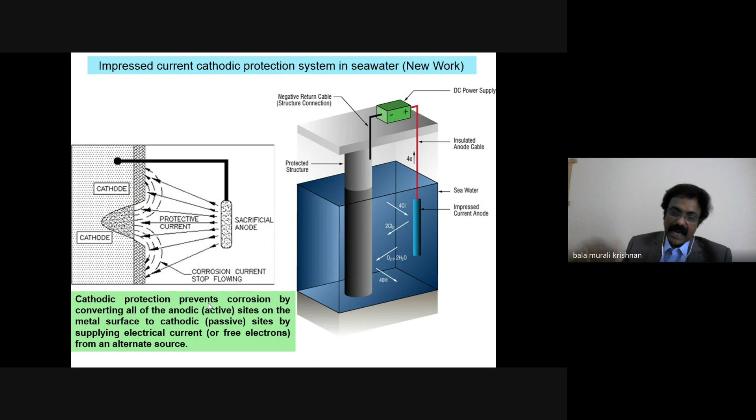Always in active mode - it is in active mode, there will be no possibility of another system entering into the rebar. Mainly cathodic protection is applied in the Gulf countries for all the oil exploration from the sea - they carry the oil through pipelines. Normally they have to protect outside with good painting, epoxy resin painting or something. How to protect inside? With the help of cathodic protection, they protect inside also to avoid corrosion.

The cathodic protection is very famous for all high-rise buildings. This is called impressed current technology - always 50 voltage passing through the rebar, so it is always in active mode without break. So there is no possibility of another current flow in the system. The corrosion is a potential flow, a current flow.

The corroded part will try to corrode the uncorroded part with the help of dissolved oxygen - dissolved oxygen is required, moisture is required, moisture is there in the concrete because of increase of moisture, dissolved oxygen also there, oxygen current flow. It acts as anode, another one is cathode - corroded part acts as anode, uncorroded part acts as cathode. The potential flow will corrode the other part also, the good part also. That's why we say corrosion is a cancer process, similar to human cancer - concrete cancer.

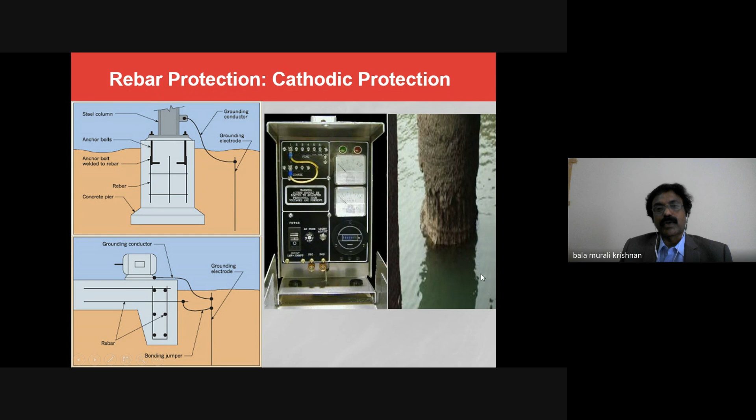So we are going with cathodic protection - there will be no possibility of corrosion, but current flow should always be there. This is nowadays, all the chemicals are used for repairing rebar and spalling of concrete, etc.

Here the rebar grouting is there. The rebar grouting is very famous. You want to extend the beam with the help of rebar. How do you bond the rebar with the finished beam?

We make the hole and provide the Lokfix. The Lokfix is nothing but epoxy resin, which is filled into the hole. Then you fix the rebar so it properly bonds into the gap, and there will be no further pulling out.

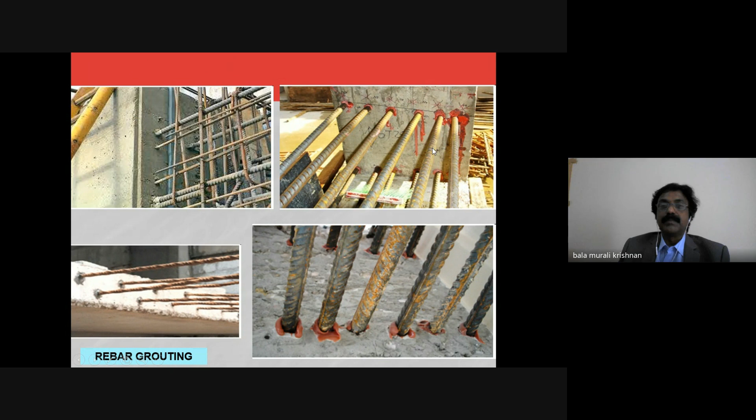So this is the way they extend the beam or slab, whatever it may be. This is called rebar grouting, and it is very common everywhere nowadays.

So this is an expansion joint in the slab area. This is a material, a plastic, rubberized, flexible material. Normally for expansion joint on the topmost floor, two slabs come together, and with the expansion joint provided, water leakage will come.

To avoid water leakage, we provide the water stopper, fixed during casting of the concrete along with the expansion joint. I think many of you find it difficult to understand these things, but this is the expansion joint with the water stopper.

Normally in the expansion joint, water leakage comes in the floor below immediately. In between floors, no issue. But at the topmost floor, say the 50th or 20th floor, the water leakage cannot be arrested. So at the topmost floor's expansion joint location, we provide a water stopper along with the expansion joint, and this way we can arrest the leakage of water.

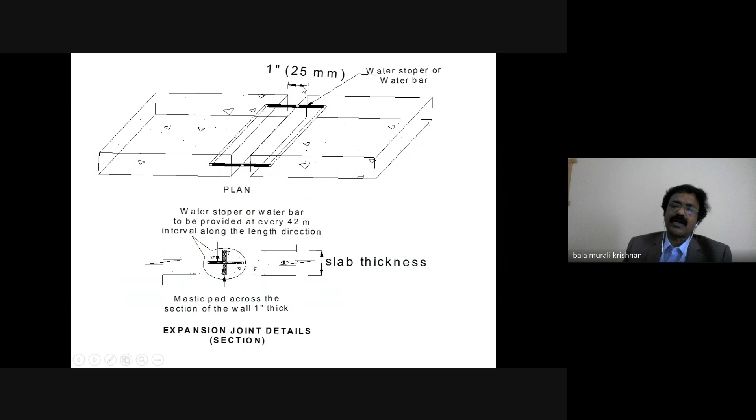This is the way we practice it after long struggle, from our own experience. We came to understand that at the topmost floor we have to provide a water stopper. This expansion joint gap is normally 1 inch to 2 inch, maximum 50 mm, depending on the size of the structure.

This is a huge building where we give the expansion joint. Otherwise, the concrete will expand, causing an expansion crack that we cannot rectify with any chemical material, Fosroc chemicals, or whatever chemicals, unless we provide the expansion joint.

Expansion joint means the column is different but the foundation is the same, with a 1 inch gap in between. Two columns are shown nearby in the drawing with the 1 inch gap. The foundation is below ground, and because it's below ground, there will be no expansion there.

Below ground level it stays at a cool temperature. Only open structures, mainly concrete in open areas, tend to expand during summer time. So the expansion joint is very, very important for huge structures.

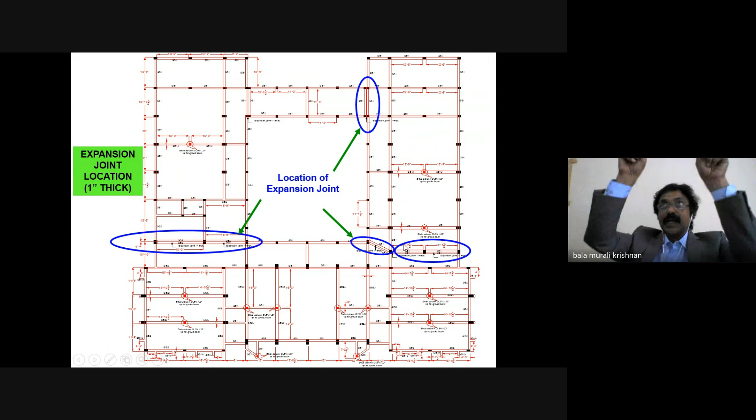If you go to any building, you can find the expansion joint. Normally the expansion joint is closed with a stainless steel plate. One plate is screwed, with one side fixed and the other side using a slotted screw. If the building slightly expands, the slotted screw allows for that movement.

Like earthquake dampeners, exactly, we are allowing the movement. If both sides were screwed, it would be very difficult and the sheet would be damaged if the building expands. That's why one side is screwed and the other side has a slotted screw.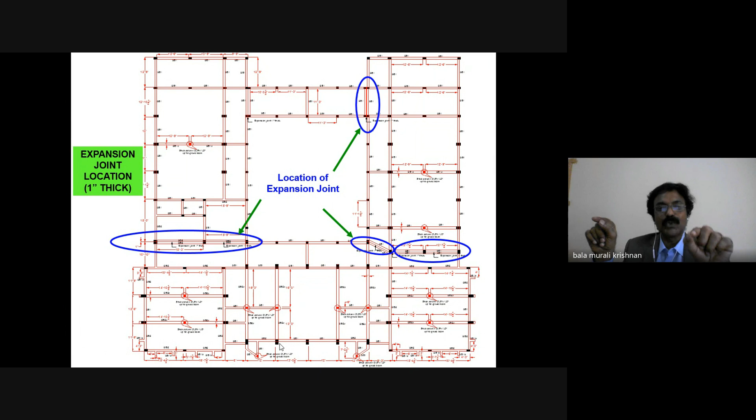This is a recent trend in construction: augmented reality, virtual reality, drones in construction, building information modeling, and 3D printing in construction. So in the future, these things will be dominating in the field.

No doubt at all, it's already started. Already started, exactly started. In future, 3D printing may be dominating, no doubt at all. So within a few days we finish the construction, no need to wait for 2, 3, or 6 months. It's not required, and moreover we ensure our quality also.

So a case study is required. I can stop it up to this level, sir. That's fine, go ahead, go ahead.

Okay, so finally let's come to one case study. Actually this is a very interesting thing. This is an actual building, a medical college building in Pondicherry. I don't want to tell the name of the college; if I tell the name, you might understand, and it's not fair. So what happens? First, we tell the story of the college.

This is a medical college building, still functioning near Pondicherry, in Tamil Nadu, on the border of Tamil Nadu. One fine morning, the building, which is G plus 3 floors...

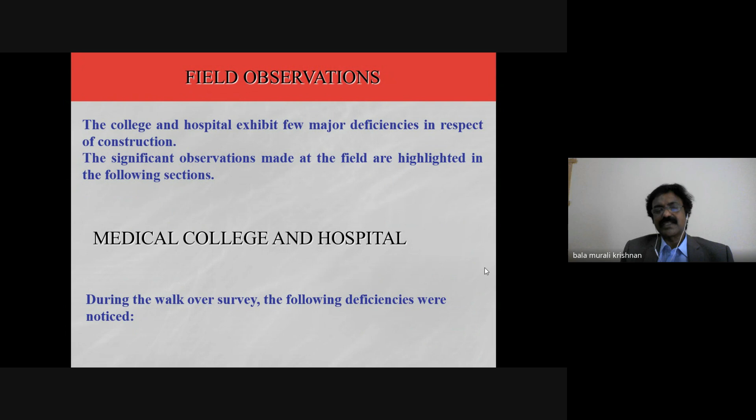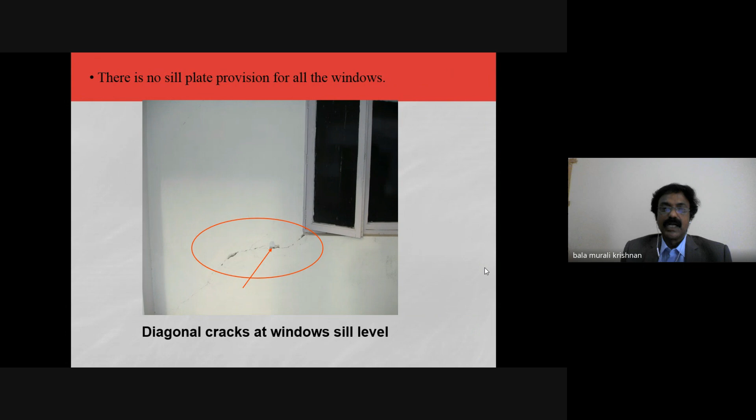When I was working at Annamalai University, they called us. So myself and my head of department visited the building and looked everywhere. First, we normally go for a walkover survey. The building had some minor cracks in the columns, and diagonal cracks at the joints, mainly around window openings. These were the things observed in the college.

This is the anatomy area - I saw the body also. Some students were doing something with the body. This is the anatomy building.

Very interesting - there were some cracks in the beam also, and some joints cracking. See the condition of the college - it's a medical college building.

Even the students were paying, in those days, maybe 50 or 60 lakhs for management quota. After NEET, things changed - they now collect every year 15 or 20 lakhs, depending on the standard of the college.

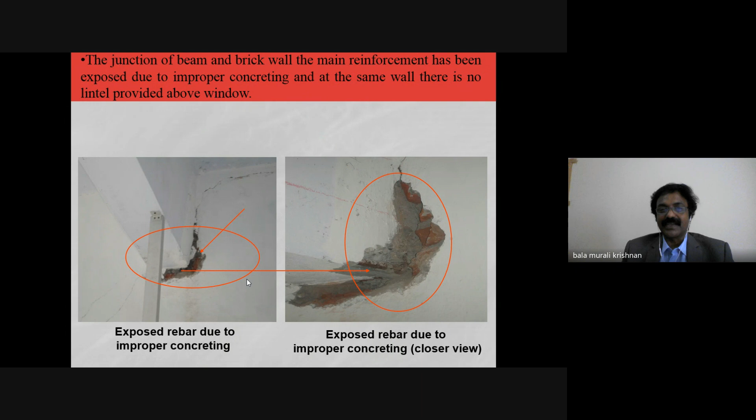See, this rebar is visible. This is a crack, this is a crack - almost all over the building the cracks look like this, a middle crack. Look at the crack, you understand? This is a huge building, G+3 or G+4, I don't remember exactly.

So all the beams had cracks at the middle, slightly away from the midspan - not exactly technically at midspan, but a little away from it. My guide, Dr. Anthony Jaisagar, from IIT Madras, a very knowledgeable person, was also with me.

We looked at the building everywhere, doing the walkover survey, but we were not able to understand why the cracks were coming. We called some people to remove the cover concrete to expose the rebar, which became visible.

The rebar condition was good, and the depth of the beam was also good based on the span condition - there was no much corrosion. The stirrups were good too, with closer spacing. The concrete was fairly good, as far as we could tell with the naked eye during the walkover survey.

We really struggled, going here and there. We were not suspecting the concrete, and it seemed good too. So finally we decided to bring non-destructive testing equipment - rebound hammer, and another one called UPV, ultrasonic pulse velocity.

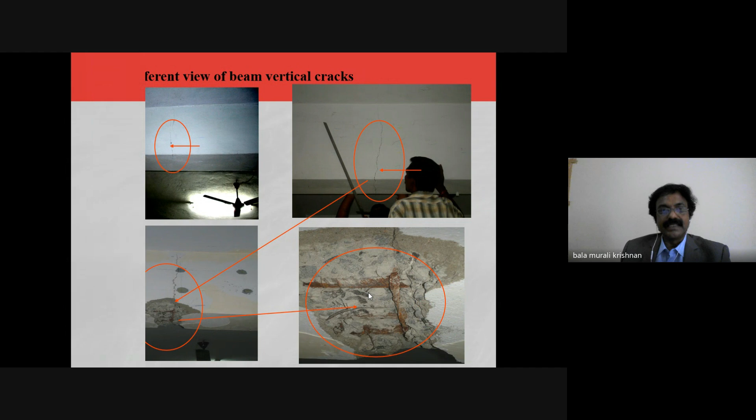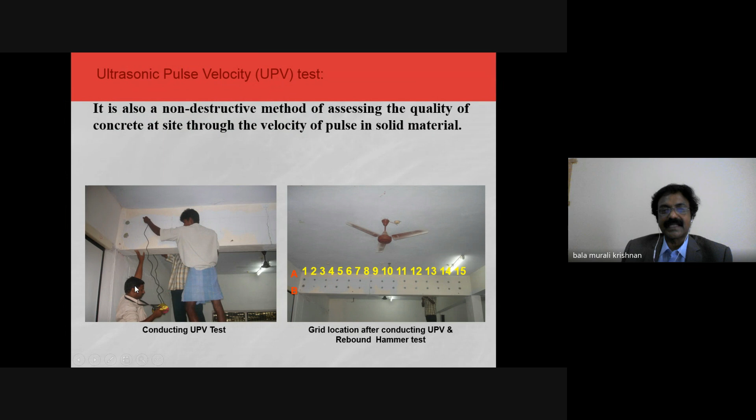Let me show this testing - this is the field investigation. Here I'm conducting the rebound hammer test, one of our staff members. This is ultrasonic pulse velocity - we pass a pulse from one side and receive it on the other side, using a pulse generator and a receiver. We took readings at many points on both sides, away from the reinforcement, for UPV on the column and everywhere.

So finally, the concrete was good - there was no issue with the concrete. The rebar was also not much corroded, and the depth of the beam was okay. So we were literally confused. Finally, I think this happened over another visit.

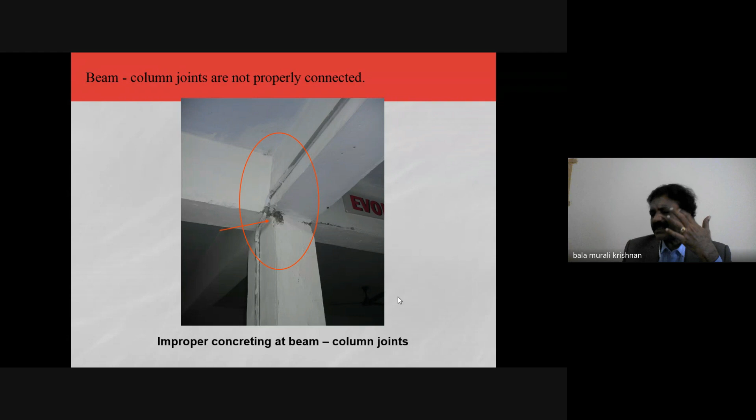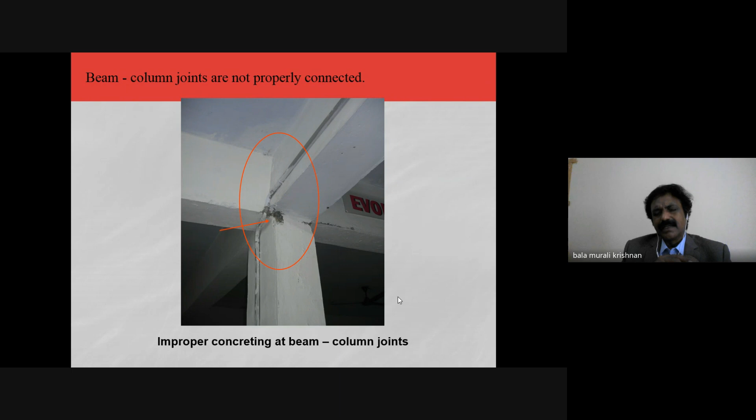On the first day they visited, they didn't say anything definite about the building. The second visit was after a one week gap. With the help of NDT equipment, we tested the building, and from the test itself we understood there was no much difficulty or problem in the building. Then why was the crack coming? All of a sudden, after 10 to 15 years, why was the crack appearing? So suddenly, we were walking over the corridor of the building.

I asked the maintenance engineer in that college, in that university. He said, no sir, this is our regular maintenance. See, tile maintenance is regular, he told me. Every 6 months or 1 year, remove the tile and refix it. It comes back within 1 year, sir. Again, remove and refix.

So if we remove the tile here also, look at the structure. The structure is fine, no issue at all. So this portion only triggered us.

This is only because of expansion. The root cause is very important. Any doctor, we say who is the best doctor - he talks good, he has a smiling face, a charming face, good face, nothing. But he understands your disease or the root cause of the disease, and can suggest the medicine accordingly.

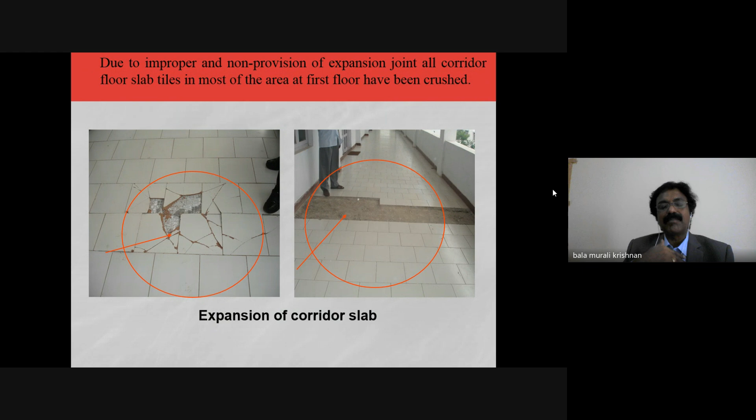The root cause is very important. Otherwise we are not able to cure the disease. This is one of the diseases, a structural disease. This is only because of the expansion joint. It's a huge building. Actually, in the plan, the expansion joint is available, but at the time of construction they completely violated the expansion - without expansion they constructed the building.

Then they give the solutions. That is a big story. I'm not telling it now, I have to compile these things.

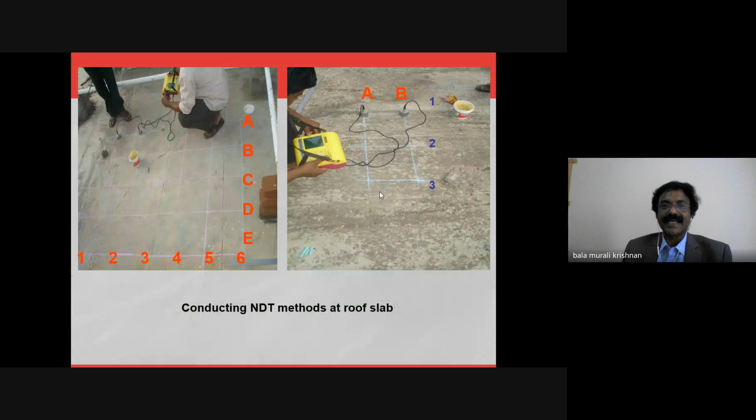These are the investigations using NDT method - non-destructive testing. Rebound hammer, ultrasonic pulse velocity. We use all the equipment. This is UPV, see this is the indirect method. This is called the direct method - here the pulse generator is placed on one side and received on another side. Direct method, this is indirect method. The slab is also checked.

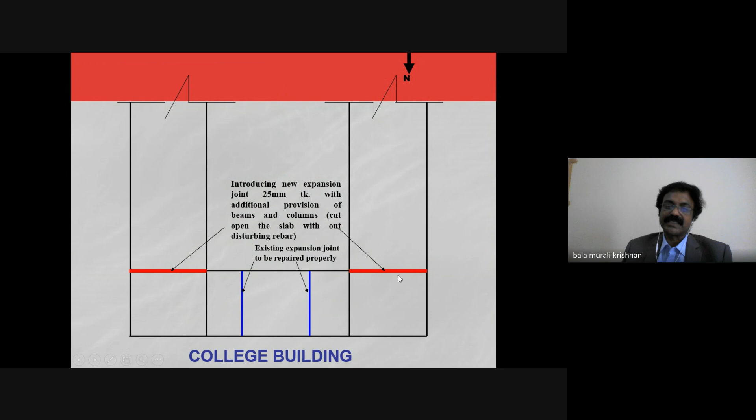Because we were totally confused, finally we suggested for the building that this portion requires an expansion joint. How to give an expansion joint in an existing building, we also suggested - that is a big story, I'm not telling it right now. Just understand, for any building, expansion is very important.

So live is more important. Normally people say dead weight is more. The body of a person who died, the normal weight is 65, 70, but the dead weight is more than 80. Because when dead, the weight will be more. Live, the weight will be less.

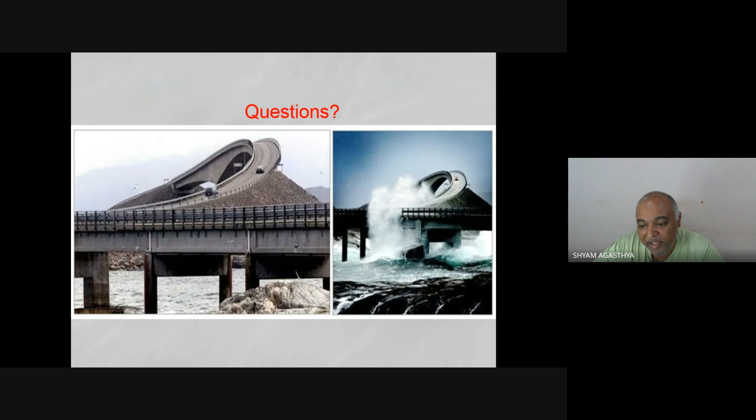Yeah, okay sir, thank you very much. Up to this slide, I can stop my lecture. I think something is boring. I don't know. No, it is very interesting. This is a very fundamental thing that every engineer should know. Yes, I'm not going in depth. Unfortunately, a lot of people fail to explain these concepts. Yes, correct, so it is very good.